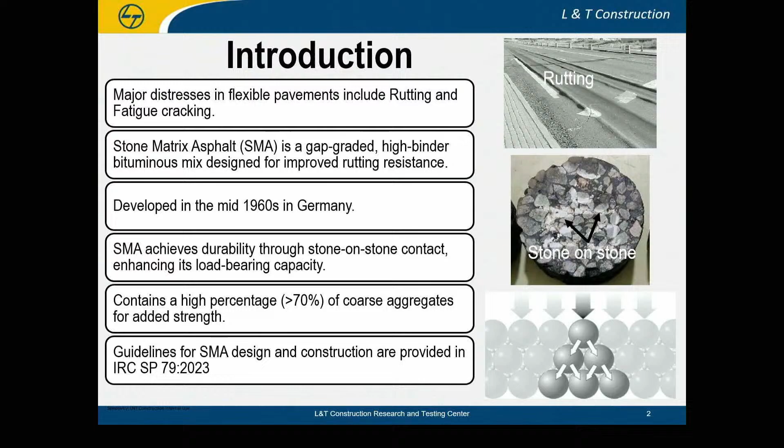So if you see the main criteria through which the SMA gains its strength is stone to stone contact, aggregate to aggregate contact, and that is possible only if we have a sound gap graded mix.

If you see global SMA gradations, the typical nominal maximum aggregate size which affects the aggregate gradation ranges from 14, which is in Australia, as the maximum size, and it goes as low as 5 in countries like Germany. But in our code IRC SP 79 2023, the nominal maximum aggregate sizes are restricted to 19, used in the intermediate binder course, and also 13, used in the wearing courses, which typically has a layer thickness of 40 to 50.

So that was the objective, that was the motivation behind our research work. Can we not reduce the nominal maximum aggregate size in SMA mixes in India? Can we not go down to 9.5, 4.75? If you go down to such lower nominal maximum aggregate size, what is the impact? And also in those aggregate sizes, what is the impact of different types and shapes of gradation curves on the properties?

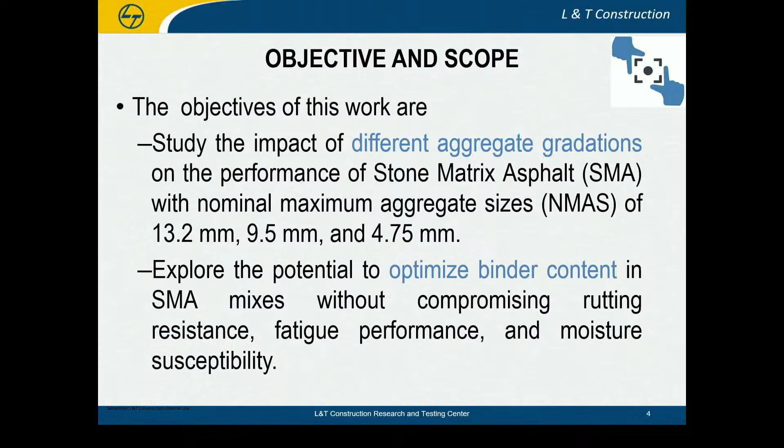So we have done a small study on that. And also one of the reasons why SMA has not been very popular in India is extremely high binder content. Of course, it is required to ensure the durability of the mix. But is there any way in which we can play around with the gradation and optimize the binder content without affecting any of the performance characteristics of the mixes?

So this was our methodology. We have considered three different mixes, 13.2, which is there in our IRC SP 79 2023. We have also considered nominal maximum sizes of 9.5 and 4.75 to produce SMA mixes. In all these three mixes, we have used three different types of aggregate gradations: S curve, mid curve, and inverse S curve. I will discuss this in my further slides.

And what we have studied is basically the volumetric properties, which is the minimum requirement of IRC SP 79. We have also done mechanical characterization of the mix, and also performance characterization in the form of Hamburg wheel tracking test, moisture susceptibility, and fatigue life testing.

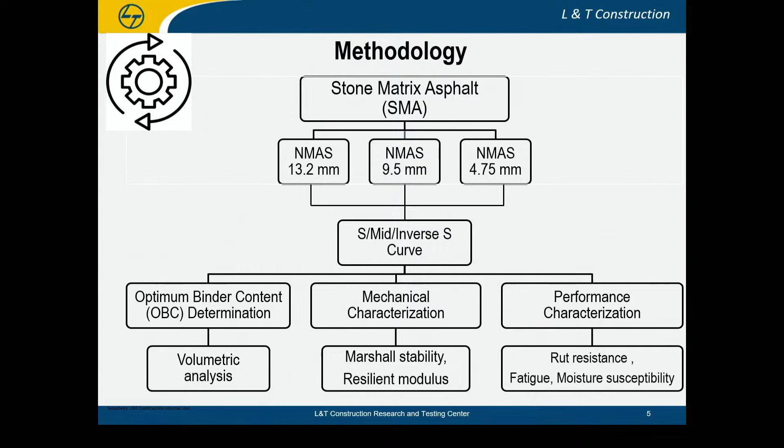So these are the raw materials. We used coarse aggregates which are meeting the MoRTH fifth revision and the IRC SP 79 guidelines. VG40 bitumen was used in this study. This study was done in 2022, where VG40 was also allowed in SMA mixes. We also used cellulose fibers which were meeting the requirements of IRC.

So this was our laboratory investigation. In volumetric analysis, we have considered voids in coarse aggregate, bulk specific gravity, optimum binder content, air voids, VMA and VFB properties. In mechanical characterization, we had Marshall stability and flow, tensile strength ratio and resilient modulus, and performance characterization was done by Hamburg wheel tracking test and 4-point bending test.

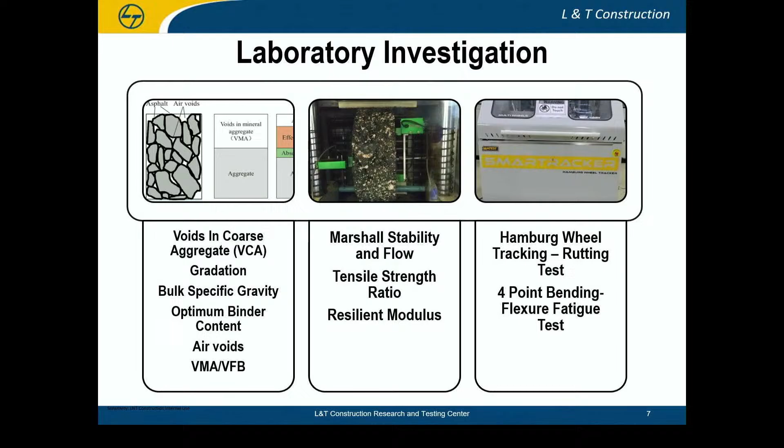So these are the gradation curves that we have used for 13.2, 9.5 and 4.75 mm aggregates. There were 3 curves which were used. One was the midpoint curve, which is considered to be the densest particle line. Then we have used an S curve, which is very popular among pavement practitioners because of its performance. And we have used an inverse S curve.

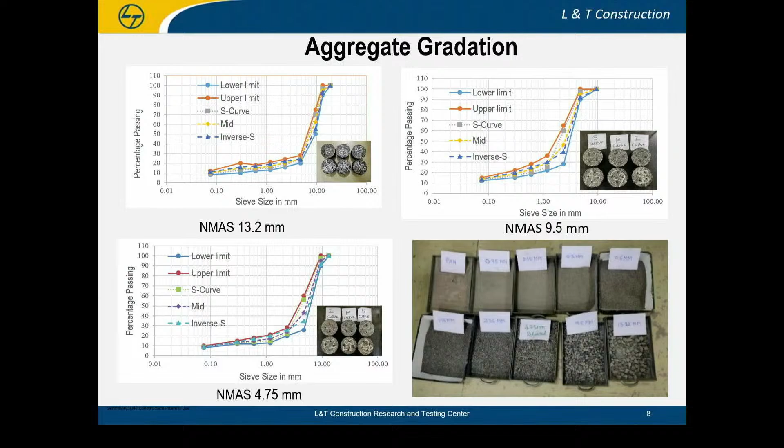So if I show you in a magnified way, the S curve had percentage passing of coarse aggregates to be finer and the finer aggregate to be slightly coarser. Inverse S curve was the opposite of it, and mid curve was the standard mid curve.

So starting with the voids in coarse aggregates, what we observed was in the inverse S curve gradation, we found the lowest voids in coarse aggregates, which indicates that there was better packing when the gradation was changed from S curve to mid curve to inverse S curve.

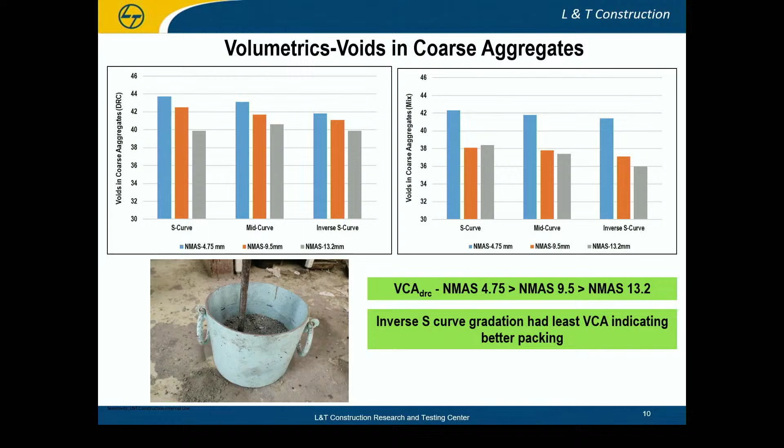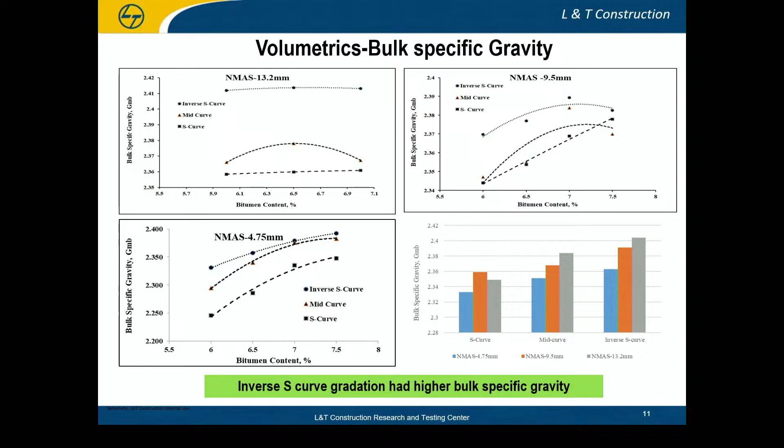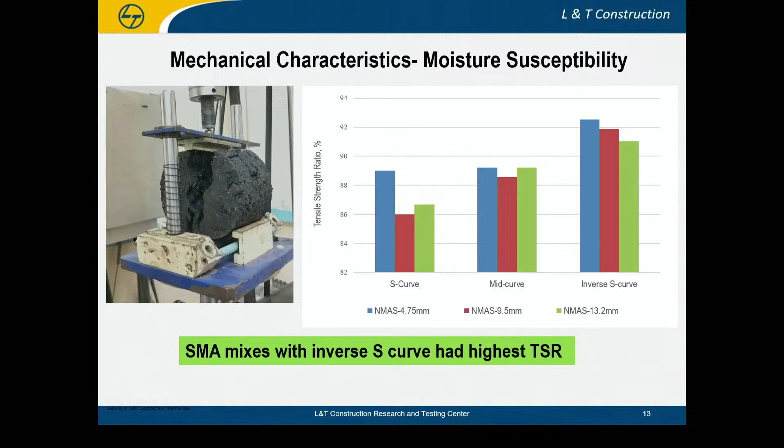The mechanical characterization was done by the moisture susceptibility test, and it also shows that inverse S curves perform better than other gradations. We can see here it was as high as 92 to 90% for inverse S curves, whereas the S curves and mid curves gave relatively lower tensile strength ratios, which indicates the moisture susceptibility or moisture related performance of the mix. We have also found out the resilient modulus of the mix.

The resilient modulus values for SMA mixes are not stipulated in IRC 37, which is the design guideline for flexible pavements. It only gives BC and DBM mixes. So we tried to quantify the resilient modulus of SMA mixes. It was slightly lower than what we get in our conventional VG40 DBM mixes. VG mixes should also be lower, but we can consider the same modulus for our design.

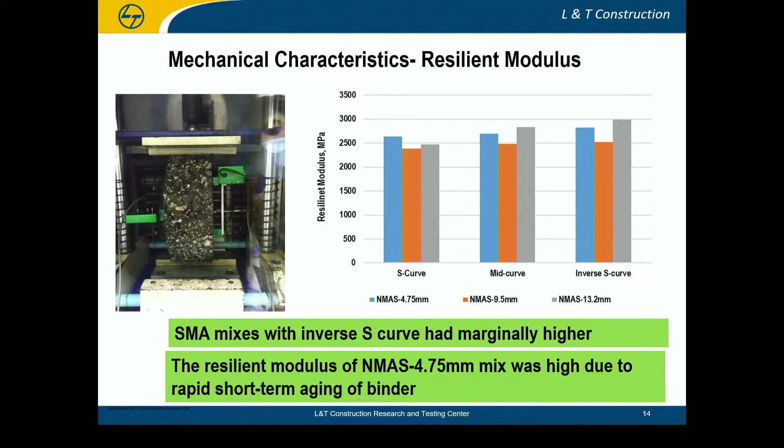Here the modulus values were slightly lesser, but because of better packing in the inverse S curve, we can see the modulus values are slightly higher than other gradations.

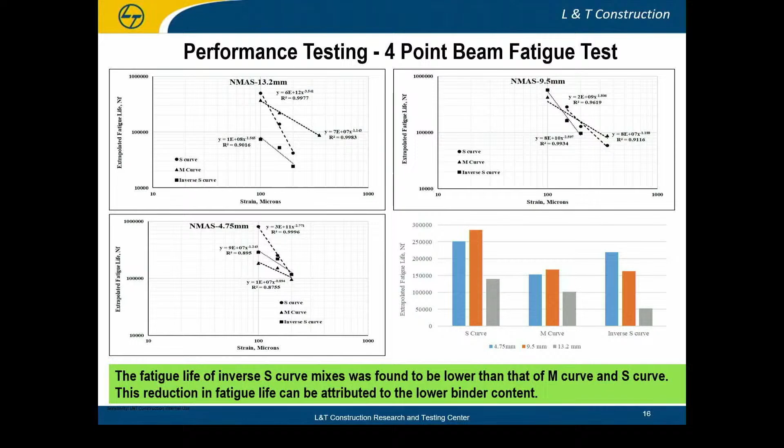Fatigue life with inverse S curve was found to be the lowest, because obviously we saw the optimum binder content was lower for inverse S curve mixes. Hence, we could find this translated into lower fatigue lives of the inverse S curve mixes.

Coming to the conclusion, we found that the inverse S curve gradation was found to furnish the most optimum particle packing, facilitating lower optimum binder content, better stiffness, and lower moisture susceptibility. The inverse S curve was found to have lower rutting potential compared to other gradations. The fatigue life of SMA mixes with nominal maximum aggregate size of 9.5 mm was comparatively better than 13.2 mm, indicating better performance and service life. The laboratory results suggest that nominal maximum aggregate size of 9.5 mm can also be considered.

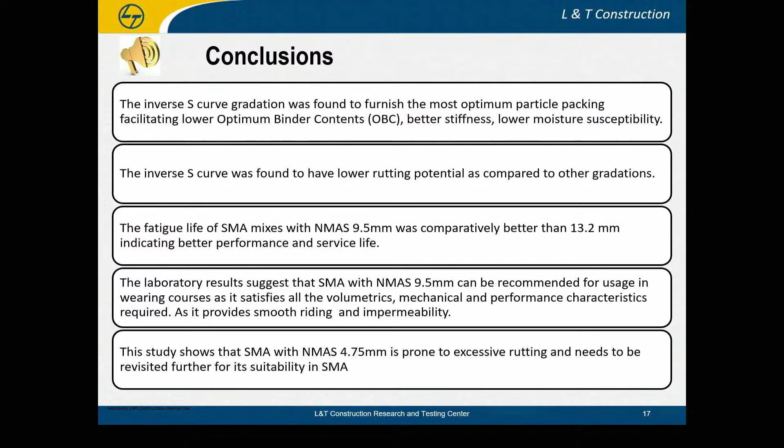But of course this is a laboratory trial. Lot of field trials need to be done to ensure that the performances are translated at the sites. But the initial starting is encouraging. And what we found is that SMA with nominal maximum size of 4.75 mm is prone to excessive rutting and needs to be revisited further for its suitability for usage in SMA.

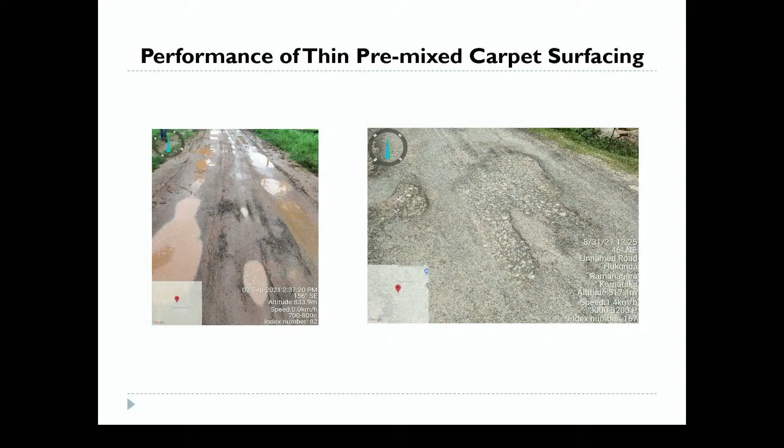They evaluated the performance of this premix carpet, not only by them, but India as a whole. We studied in a pan-India study: NIT Kurukshetra, IIT BHU, MNIT Jaipur, SGS Institute of Technology Indore, IIT Patna, NIT Trichy, as well as Rasta Bangalore. We have evaluated 116 sections in 365 kilometers.

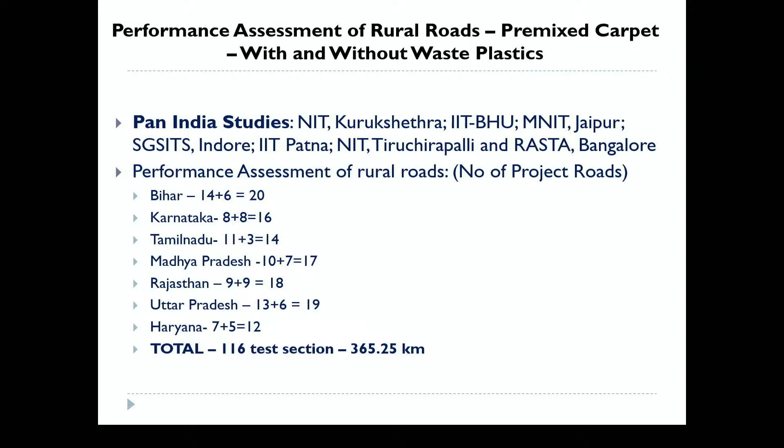So the question at this point of time is how will a dense mix perform? If you look at the cost comparison, finally what we say is India is poor, we cannot afford bituminous concrete or dense mixes. If you look at the cost, I collected data from Andaman Nicobar to Andhra Pradesh to Arunachal to Assam to Maharashtra. We find that the cost of premix carpet is not cheap as we think.

The cost comes to around 200 to 225 rupees. In some states it is 437. When you compare the cost of a BC of 25 millimeter, the cost is comparable. If you want to compare apple to apple, 20 millimeter to 20 millimeter, you will find that BC is relatively the same cost.

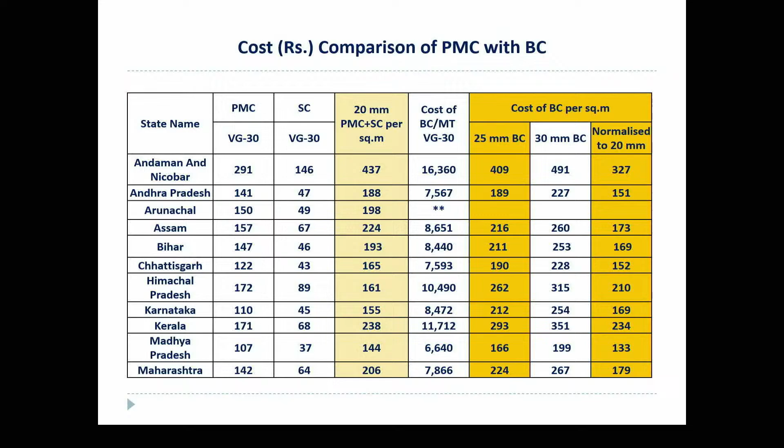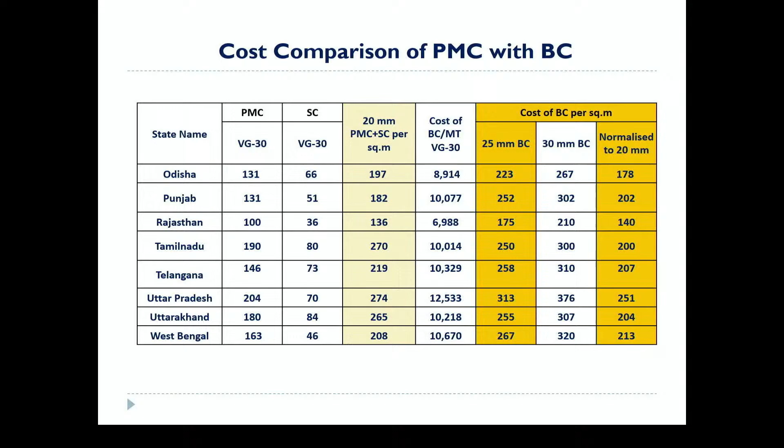Not only that, you can also check other states - Odisha, Punjab, Rajasthan, Tamil Nadu, Telangana, Uttar Pradesh. You can find any state for that matter. The cost of 25 millimeter BC is comparable to that of 20 millimeter premix carpet with a seal coat.

So the issue at this point of time: in Tamil Nadu, when you compare, the cost of premix carpet is 15.25 lakh per kilometer. The cost of BC is only 15.57. Now understand, BC is not costly. What are the other implementation issues? That's what we should talk about.

So the need for the study is that, as per MS2, the compaction level for a Marshall on both ends for traffic less than 10,000 is around 35 blows. For medium traffic, between 10,000 to a million, they say 50 blows. And for higher traffic, they say it should go for 75 blows.

I tried to introduce that in IRC 111, but engineers did not agree for that. They said that for heavily overloaded trucks it will wreck - all the stories they told. Finally I could not introduce that in the new 111.

But what happens is that in the case of low volume roads, because traffic is low, when you compact them initially to 7 to 8%, they do not reach the 4% voids by the end of the design life. The voids remain at 5 or 6. When the void becomes high, it becomes pervious. It is subjected to cracking. It is subjected to moisture-induced damage.

So what we are trying to say is do not compact the low volume road concrete to 75 blows. If so, what should be the number of blows? Vishnu will answer that question. Second, these layers will not reach 4% voids at the end of design life. If so, what should be the desirable compaction standard for low volume roads? We have studied the performance of thin layers of 30 millimeter with BC.

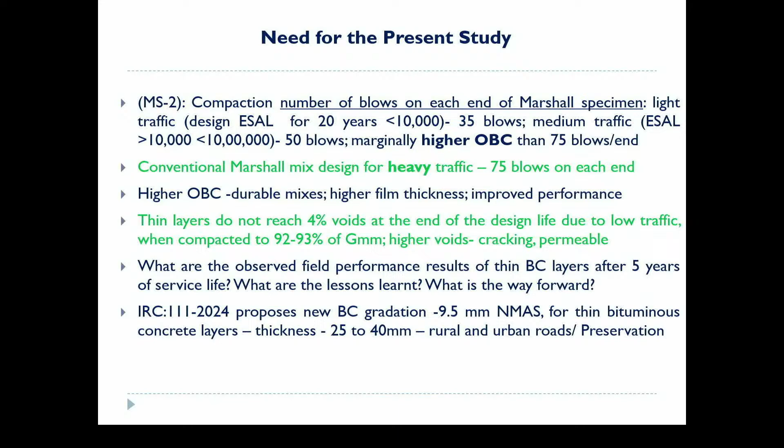I request Vishnu to take it forward with what we have studied. Over to you, Vishnu. Thank you, Professor. Now let me continue the presentation.

We need to understand in any mix design, what does the compaction effort simulate? If you see Marshall mix design as well as Superpave, the compaction effort is expected to simulate the primary and secondary compaction that mixes are likely to undergo in the field. As roads cater to different traffic levels, it is important that these compaction efforts represent the traffic level appropriately.

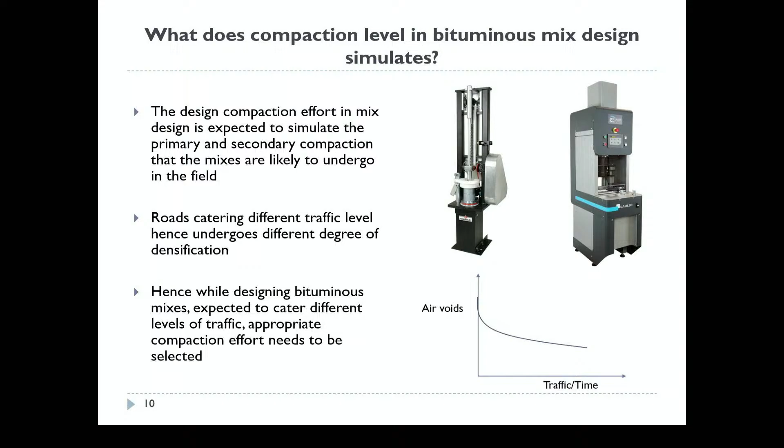If you see the design standards, for example the initial Superpave mix design which came in 1996, the design compaction effort was given as a function of traffic level as well as temperature. Later when they revised it, this was given as a function of traffic level alone.

If you see the original Marshall mix design, which came in the 1930s, you could find that it was also a function of traffic level. But when we adopted this in MoRTH, we are actually designing all our mixes by applying 75 blows of compaction.

Now, when we are trying to adopt dense mixes for low volume roads, it is very important to see the densification characteristics of these mixes.

The objectives of the study are: to evaluate the densification characteristics of dense graded bituminous mixes when placed as thin surface course layers in low volume roads; to estimate the design compaction effort for designing dense graded mixes as surface courses in low volume roads; and to evaluate the implication of lower design compaction effort in terms of the primary compaction.

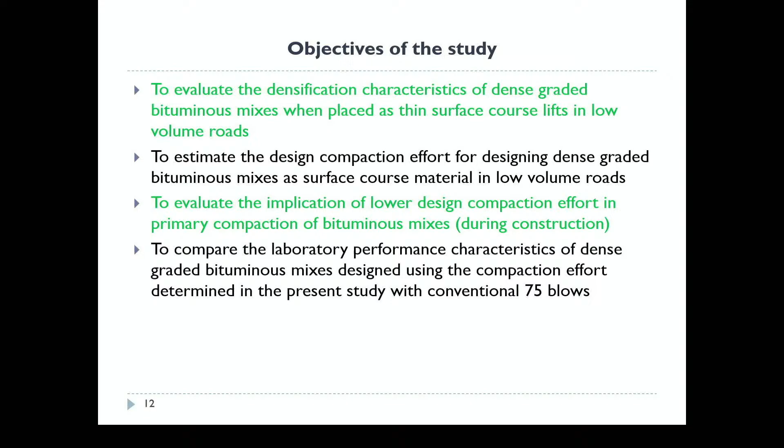The fourth objective was to compare the laboratory performance of dense graded bituminous mixes designed by the compaction effort we determined in our study with the conventional 75 blows.

We have two sets of analysis. For the first set, we had laboratory studies where we collected field cores from sections where dense graded bituminous mixes were implemented. Two states in India have implemented these mixes: Telangana in their PMGSY projects as well as in their ODR and MDR roads, and Kerala in the Rebuild Kerala initiative, where they implemented dense graded bituminous mixes of 30mm lift thickness.

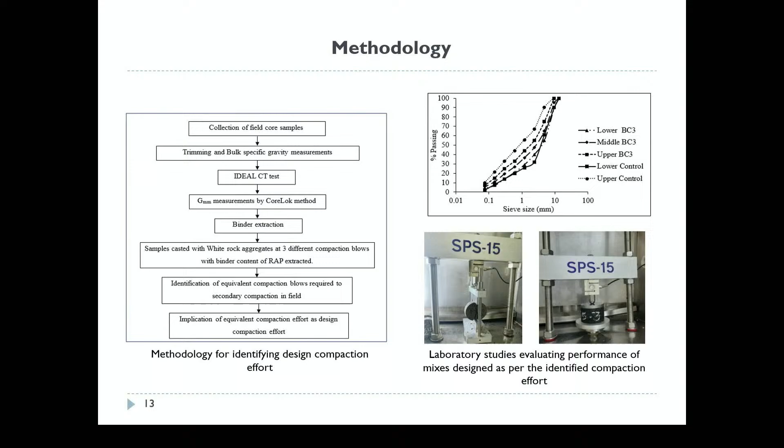The second part of the study was a laboratory investigation trying to understand the implication of this reduced compaction effort on the mix volumetrics as well as on performance.

Let me briefly explain this. In the state of Telangana, in ODRs and MDRs, they started constructing these dense mixes from 2018. We took field cores from Khammam district, where the roads were about 4 to 5 years old, sampling 15 roads. From Warangal, we took 7 roads with an age of 1 year. And from Kerala, we had 8 roads taken, with an age of less than 1 year.

Let me explain the pattern of coring we did. We didn't have initial information on what air voids these mixes were initially compacted to. So we collected two sets of cores: the first core was collected from the pavement edge, nearly 0.5 meters from the edge, and the second was taken from the wheel path.

For the cores collected from Warangal as well as from Kerala, these were collected at 0.7 to 1 meter from the pavement edge. Now you could actually see the air voids of this.

So you can actually see, if you look at the field cores taken from the edge, the air voids are in the range of about 8 to 9%. That's the first figure I'm presenting here. Whereas from the wheel path, when we are taking cores, these mixes have only undergone densification.

It was only having air voids in the range of about 6 to 7%. So what we need to understand is when we are actually placing these dense mixes, designed by 75 blows, these mixes are not undergoing significant secondary compaction. Now this will have implications.

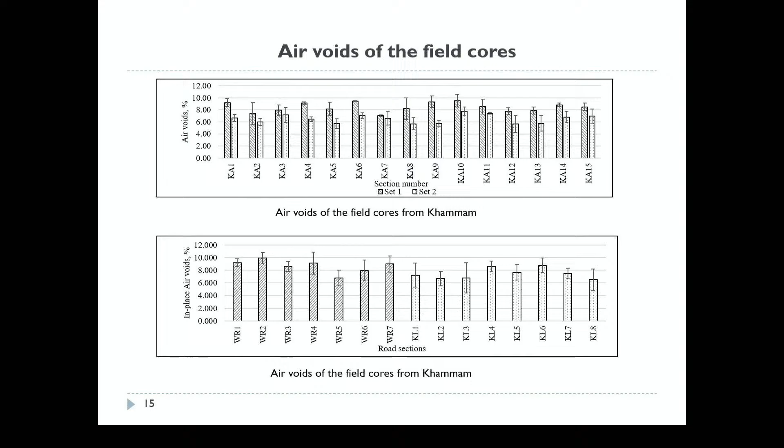So you can see here, the mixes designed by applying 75 blows had lower initial air voids. We then examined the distribution of air voids over a period of 5 to 6 years, the air voids were reduced only from 8% to about 6.5%.

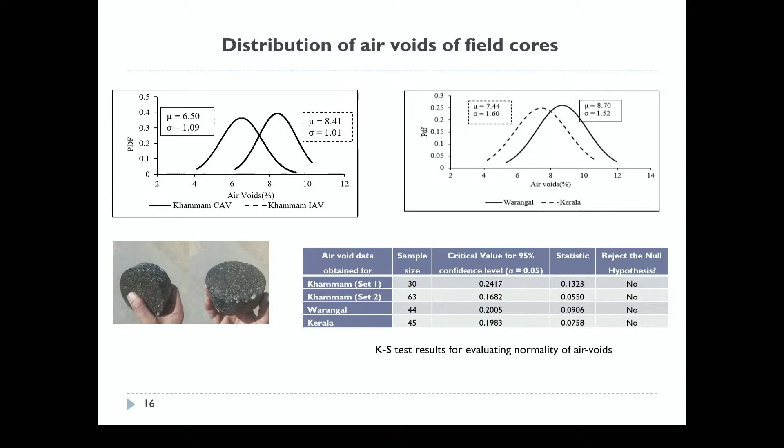These were the roads which were in service for about 5 to 6 years. Now, when there is no traffic moving on these roads, these mixes will remain as they are, and as they remain open, they will undergo excessive aging. To understand this implication, we carried out the IDEAL-CT experiment.

You could see that the IDEAL-CT values of the cores we collected from Khammam were in the range—the mean value was about 21. This has a high propensity for cracking once traffic starts moving on it.

But whereas if you see the IDEAL-CT values of the cores collected from Kerala, this was coming in the range of 100. This is because these mixes have relatively higher binder content.

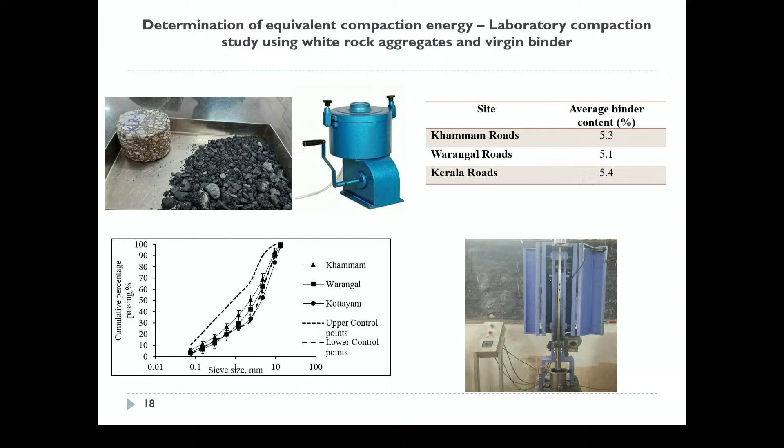Now, to identify the design compaction effort, we collected these field cores, loosened these mixes, and got the white rock aggregates. These were compacted at two binder contents, one at 5%, the other at 5.5%. You could see that the cores from Khammam had a mean binder content of 5.3.

Now what we were looking into was the number of compaction efforts which can actually simulate the air voids in the field, and we could identify that nearly 46 blows of compaction can actually simulate the degree of densification these mixes undergo in the field.

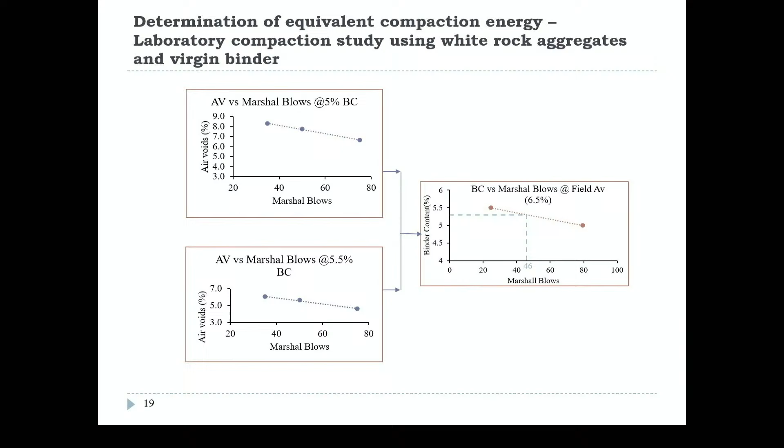Now, to understand the implication of this reduced compaction effort, we carried out volumetric and performance tests on mixes having NMAS of 9.5. We had 5 aggregate gradations for which we designed these mixes by applying 46 blows as well as the conventional 75 blows.

So I'm winding up. You could see here, when we are designing these mixes at a reduced compaction effort, obviously your binder content will be on a higher side.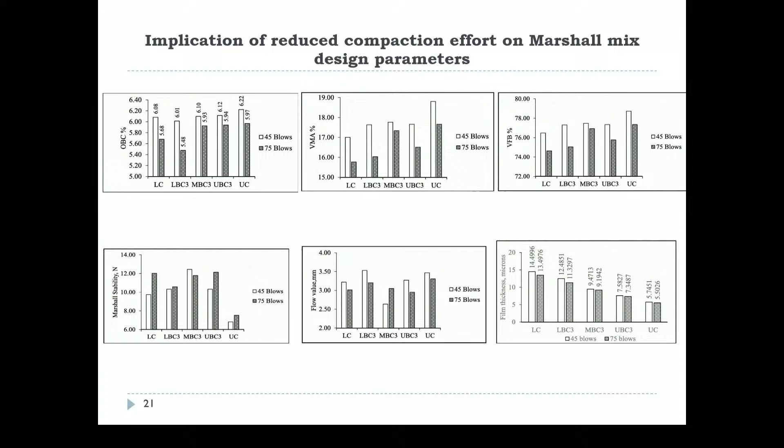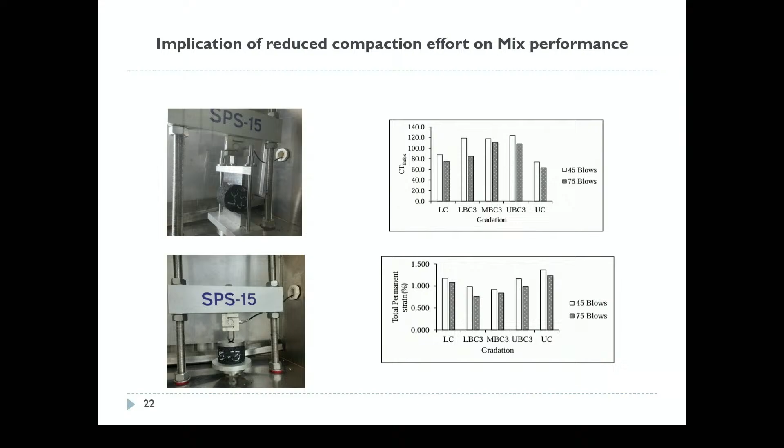Now we also carried out performance tests by carrying out IDEAL-CT and dynamic creep tests. You could see here, when these mixes are designed by applying 45 blows, the IDEAL-CT index of these mixes were improved. And these are our conclusions.

Mixes which were designed by applying 75 blows left relatively larger voids. So it is very important to design these mixes at a reduced compaction effort. Mixes designed by applying 45 blows of compaction had improved placement characteristics in terms of reduced air voids.

You could also see that the IDEAL-CT index values of the field cores we collected from Khammam were relatively low. This actually shows signs of higher propensity for cracking.

Now the study recommends 45 blows of Marshall compaction on both sides for designing dense mixes for low volume roads. Comparative analysis showed that when you design mixes by 45 blows, there is an increased bitumen content. Now this becomes a concern for everyone.

Now, if you want to continue to design these mixes by applying 75 blows, it is important that you compact these mixes to reduce voids. That means initially when you compact this, you have to compact it to an air void of about 4 to 5%. Now this can become challenging. This has to be quantified.

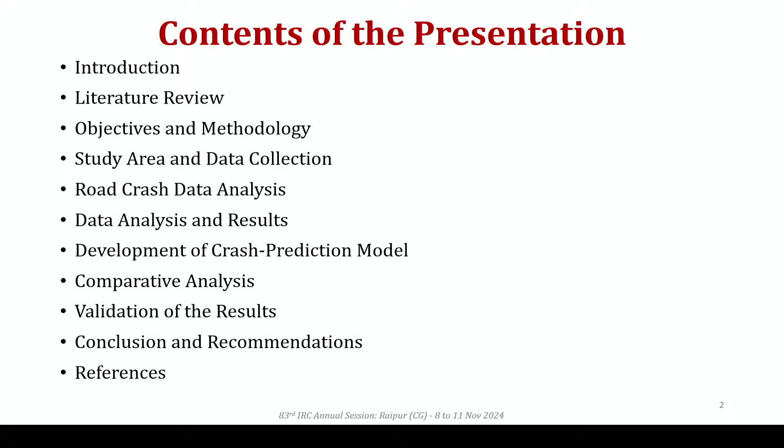So let's start with introduction. As we all know, road safety is a major concern globally and in our Indian country also, where road crashes are increasing year by year. As we can see from the latest MoRTH report, in year 2022 we have around more than 4.6 lakh road crashes and 1.68 lakh fatalities. Road crashes have increased 11.9% from last year to current year, fatalities by 9.4%, and injuries by 15.3%.

To rectify this road crash issue, mostly all the roading agencies identify black spots, that is basically high risk potential areas in our road network in terms of intersections, mid-blocks, or any high risk corridors. So a black spot is a road segment or location known for disproportionately high frequency of crashes or fatalities. It may be due to various factors like road geometry, human factors, traffic, and environment.

In India and internationally, we have many methods to analyze and identify black spots, like statistical analysis, crash rate analysis, risk mapping, GIS analysis, road safety audits, etc. These methods introduce some inaccuracies in the outcomes of black spot identification analysis, that lead to generating some false positive and false negative results. For example, if we falsely predict a black spot but actually the results are not good, this hinders the understanding of high risk locations.

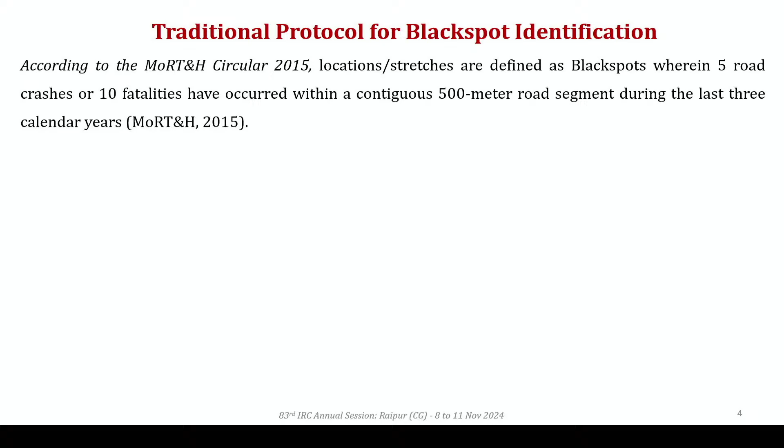This is the traditional protocol for black spot identification that we were using before year 2022. This was published by MoRTH, Ministry of Road Transport and Highways, in the form of a circular in year 2015. It defines a location or stretch as a black spot where 5 road crashes or 10 fatalities have occurred within a 500-meter road segment in the last 3 years.

Two years ago, IRC 131 was introduced, which showcases the guidelines for identification and rectification of black spots. It introduces around 4 to 5 systematic processes for black spot identification which are aligned with a safe system approach and multiple international standards. It includes first, the annual average total crashes method with a setting reaction level approach; second, heat map analysis and corridor analysis; and then the severity index and severity indices method.

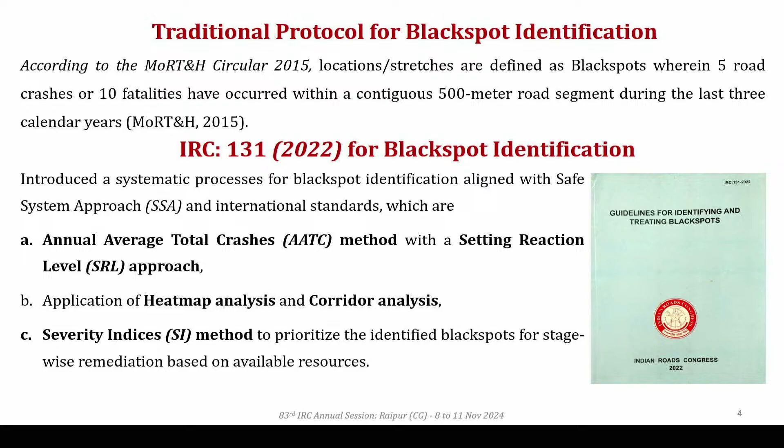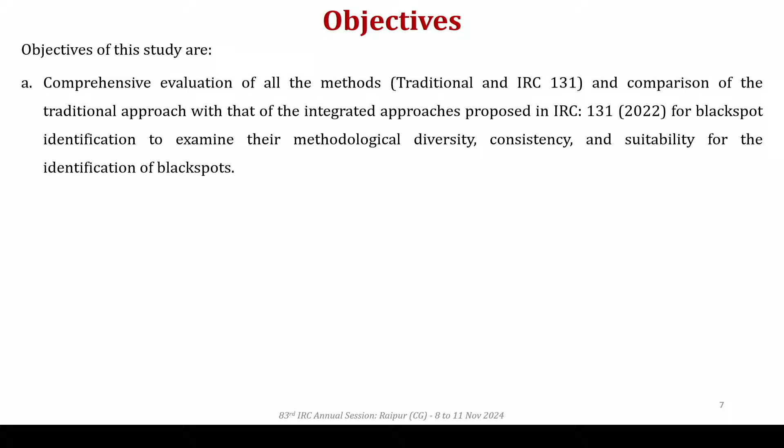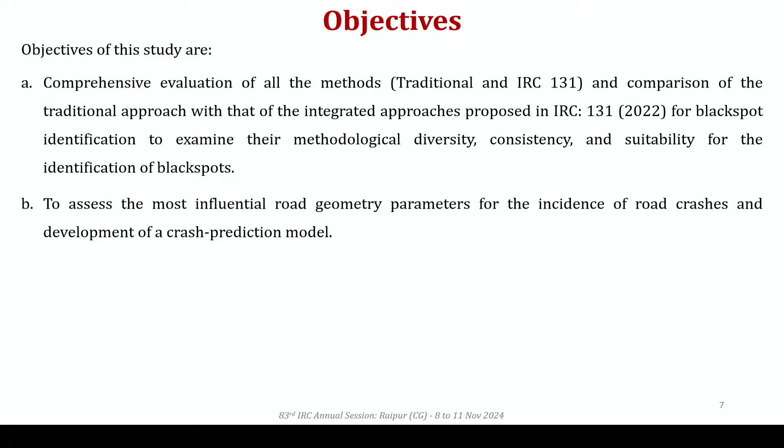Based on the previous studies and literature, we have set objectives like comprehensive evaluation of all the methods present in India, like traditional and IRC 131 methods. Secondly, comparison of the traditional approach with the integrated approach proposed in IRC 131 for black spot identification, to examine their methodological diversity, consistency, and suitability for identification. Third, to assess the most influential road geometry parameters for the incidence of road crashes and development of a crash prediction model, mostly based on the road geometry part.

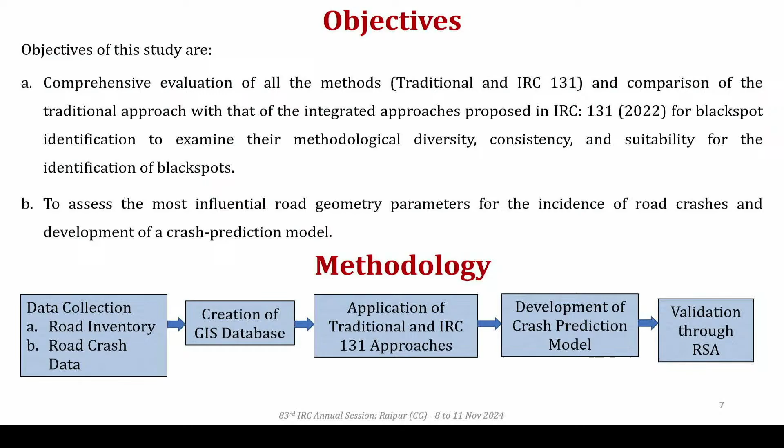To do the study, we selected one study area on NH44 that starts from Hyderabad outer ring road to Adilabad city. This is a 290-kilometer road network in National Highway 44, situated in Telangana state. This corridor is a 4-lane divided, partially controlled access highway with multiple median openings at less than 2-kilometer intervals.

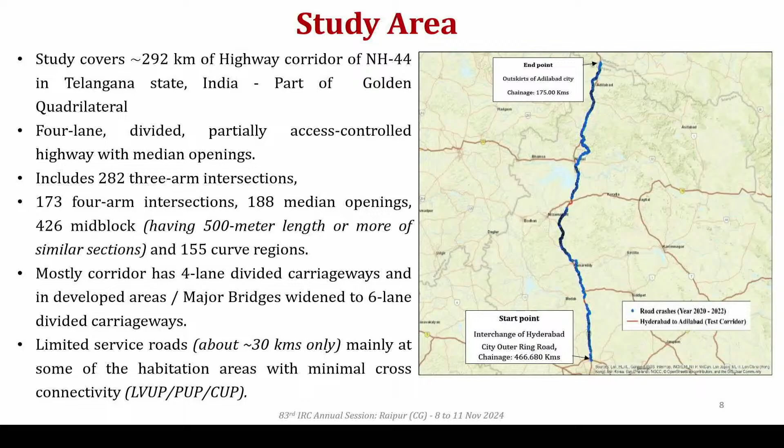It includes 282 3-arm intersections, 173 4-arm intersections, 188 median openings like this, and also 155 curve regions. This test corridor has limited service road, about 30 kilometers only, mainly at some habitation areas with minimum connectivity.

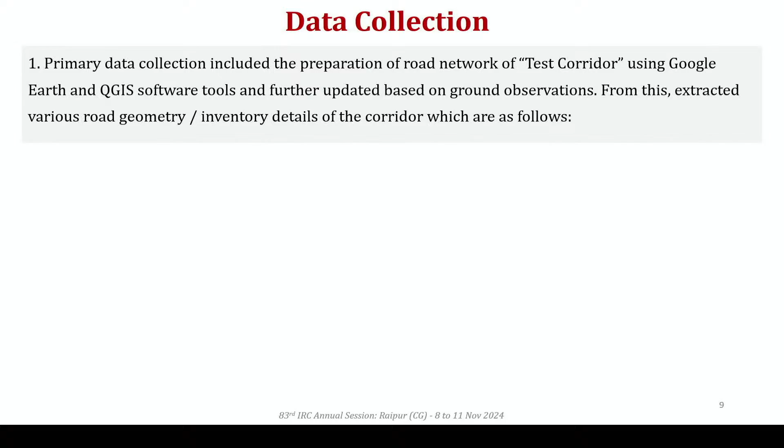To conduct the study, we collected two kinds of data. Firstly, we extracted all the road geometric details from the prepared test corridor developed using Google Earth and Google Maps, and further improved through QGIS software. From the test corridor, we extracted multiple road geometric parameters like road width, curve regions including horizontal and vertical, intersections (3-arm, 4-arm), and presence of median openings.

Secondly, we collected the road crash data, historic crash data from NHAI of the last 3 years from 2020 to 2022, totaling around 1504 road crashes, including the claimed fatalities and injuries of this test corridor.

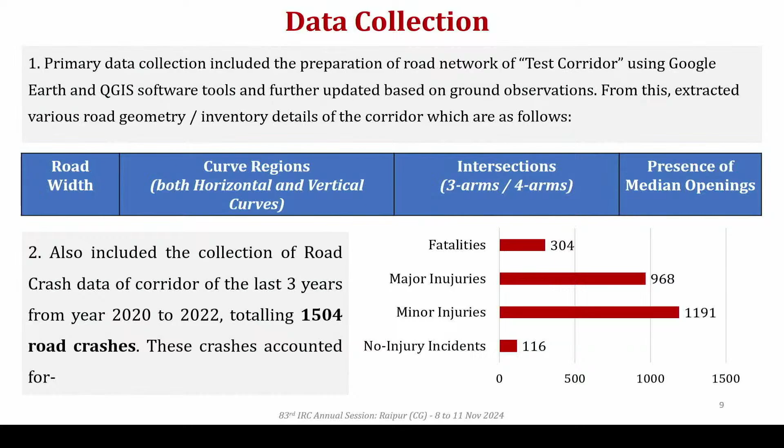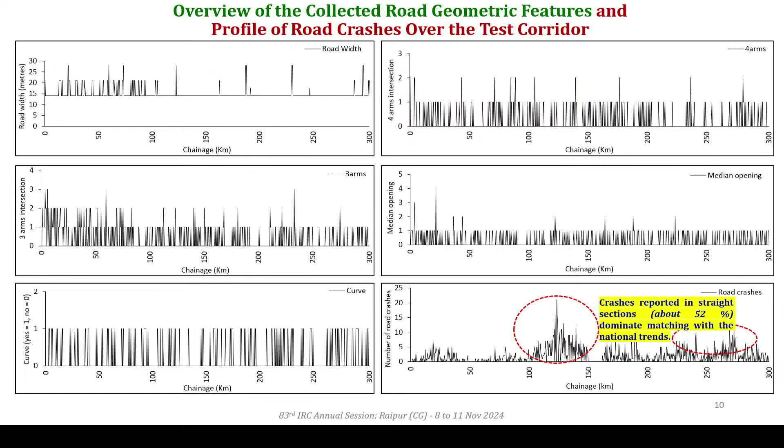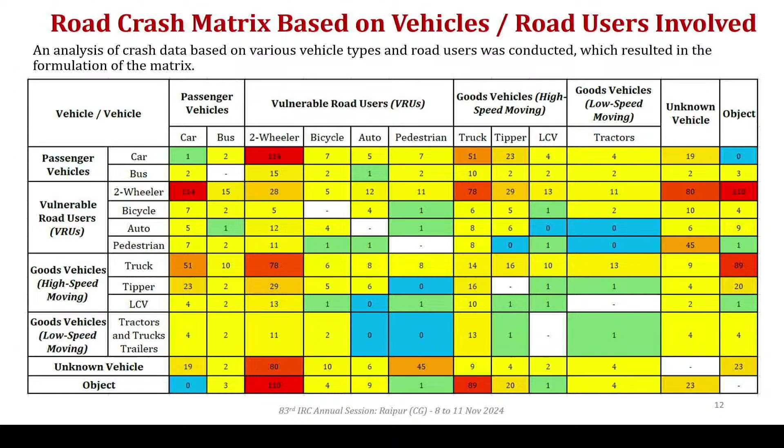After that, we prepared road crash matrix based on vehicles involved. We developed comprehensive data on vehicle and road users involved in these road crashes. We observed mostly goods vehicles, two-wheelers, cars, and unknown vehicles or static objects were involved in these crashes in this test corridor.

After that, data analysis and results. Data analysis starts with the segmentation of the test corridor, as mentioned in IRC 131 and MoRTH protocol. We segmented our study corridor into 500-meter segments, resulting in a total of 584 segments considered for analysis. For the specific corridor analysis method of IRC 131, the study corridor is empirically segmented into 10 equal segments, as no segmentation method is present in IRC 131.

Secondly, the creation of a GIS database. To perform the analysis, we developed a GIS database in QGIS software, where we incorporated all the road geometric details and road crash information, including fatalities, injuries, 3-arms, 4-arms, etc.

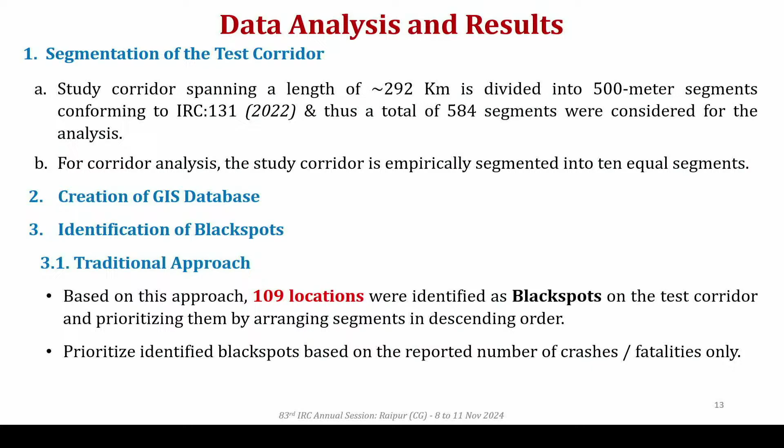After that, we performed identification of black spots. Using the first traditional approach, the MoRTH protocol, we identified 109 locations based on the 5 road crashes or 10 fatalities definition, prioritizing them by arranging segments in descending order. Secondly, we identified black spots based on the reported numbers of crashes and fatalities only.

Second method of IRC 131 is the annual average total crashes (AATC) method with the setting reaction level approach. This method's objective is to identify crash-prone and black spots by calculating the annual average total crash value. This is a new term for our black spot identification analysis across all road categories.

This is the procedure for calculating AATC per 500-meter value. First, we collect the fatal crash data of all road types and states. Then we calculate the road length for each road category, then calculate AATC per kilometer value, and lastly, AATC per 500-meter value.

The process to identify black spots using this method is: first calculate the AATC per 500-meter value for all kinds of road network and state type, then identify black spots as 500-meter segments where crashes exceed the AATC per 500-meter value.

After identification of black spots, to categorize them we use the setting reaction level approach, where first order black spots are where the crash value exceeds 15x of AATC, and second order black spots are where crashes have increased from 10 to 15x of AATC. Likewise, the third and fourth order black spots are calculated.

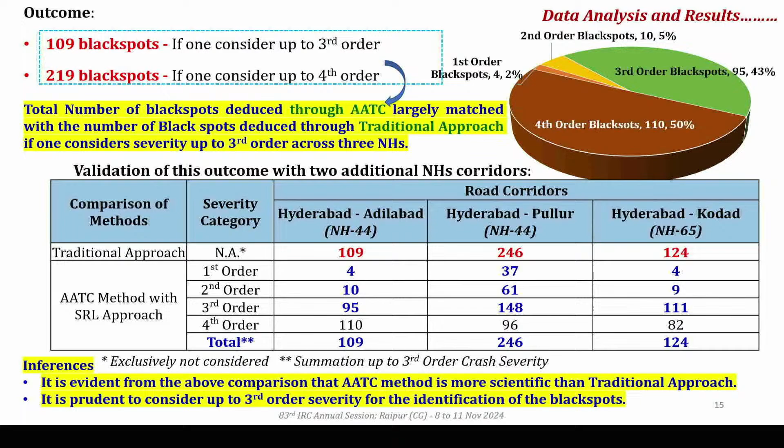The second method of IRC 131 is heat map analysis, where we identify crash hotspots using geospatial analysis in GIS software. We import all the test corridors and road crash data into the GIS platform, and apply kernel density estimation methods like point density estimation to identify crash hotspots. This gives hotspots with varying colors, where warm colors represent high density crash regions and cooler colors represent low density crash regions.

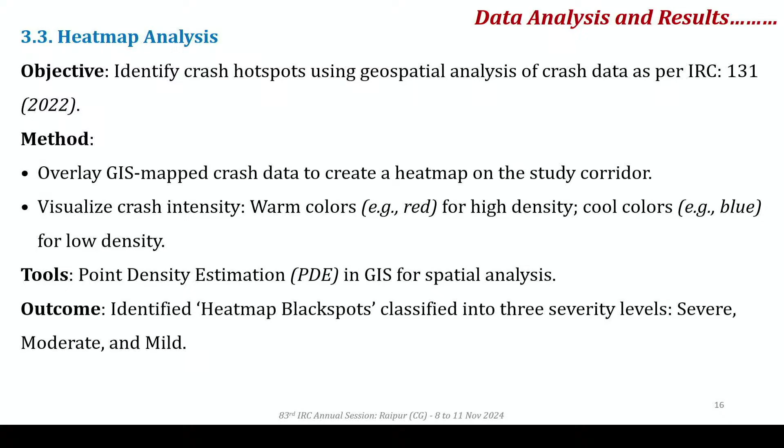We have categorized these hotspots into three categories based on severity: severe, moderate, and mild.

Third is corridor analysis, which is mostly similar to heat map analysis. Here we segmented our test corridor into 10 segments empirically and applied line density estimation to identify the most severe segment in our test corridor, where segment 5 is the most severe segment we identified.

This is the fourth method of IRC 131, the severity indices method. This method is proposed in IRC 131 to prioritize the identified black spots for rectification and remedial measures work, using weights: for fatal crashes weight is 10, for major injuries 5, minor injury crashes 2, and no injury crashes 1.

These weights are normally only for prioritization of identified black spots. But in our study, we propose using these weights for identification of black spots as well, using the following process: first calculate the crash severity index for each segment based on these weights, second calculate the mean severity index and standard deviation, and third calculate the threshold crash severity index using a normal distribution method with a Z score at varying confidence levels like 95%.

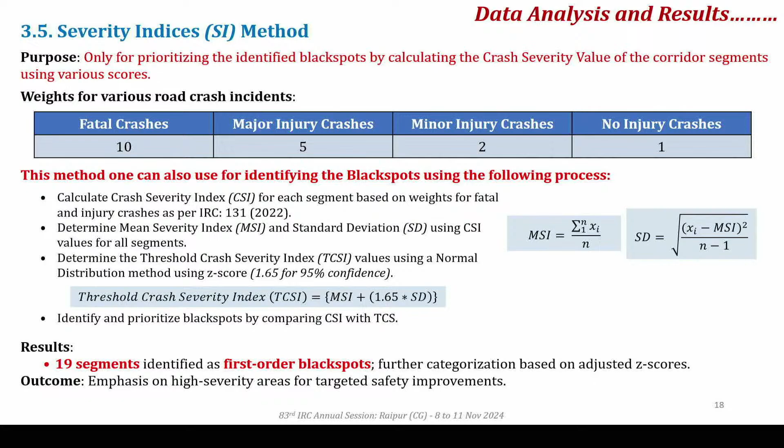The outcome of this method is 19 segments identified as first order black spots, with further categorization based on adjusted Z scores.

Moreover, we have developed a crash prediction model, since we don't have any crash prediction model based on road geometry parameters. We developed it using parameters like road width, curve regions, intersections, and presence of median openings. We built a GLM model, a generalized linear model, using a Poisson log-linear approach, and found all these parameters significant with road crashes.

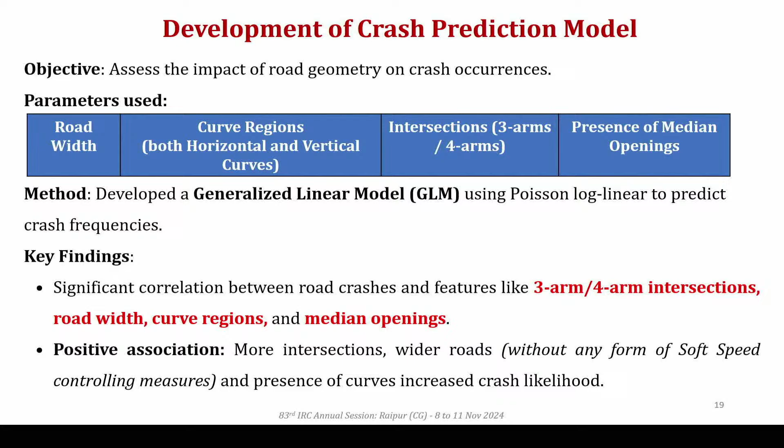This is our model for predicting black spots based on road geometry parameters, where all the parameters show good significance against road crashes.

These are our identified black spots, the top 20 identified from various methods: first from the traditional approach, then the AATC method, SI method, heat map analysis, corridor analysis, and lastly the crash prediction model.

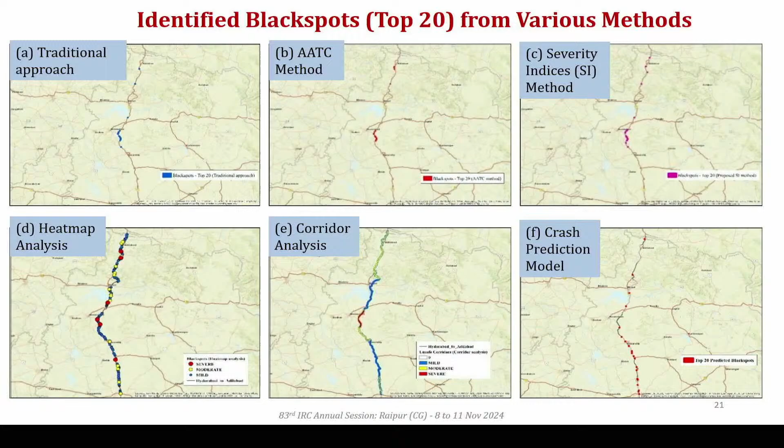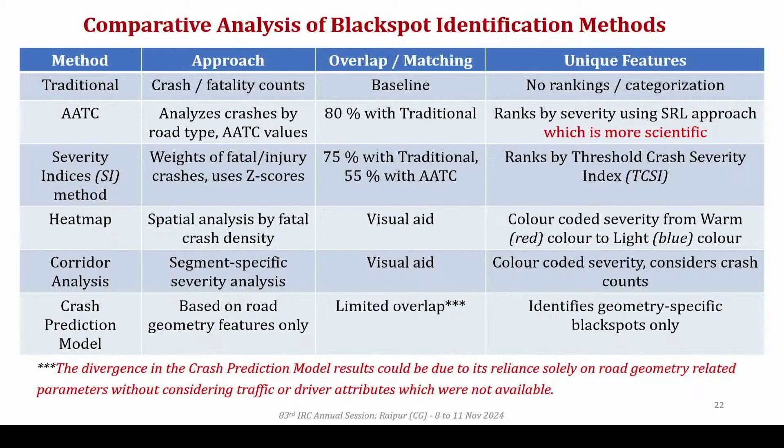The severity indices method aligns 75% with the traditional approach and 55% with AATC, and we rank and categorize all identified black spots by TCSI values. The heat map and corridor analysis methods give only visual results. We come to conclusions, and these are the list of top 20 black spots.

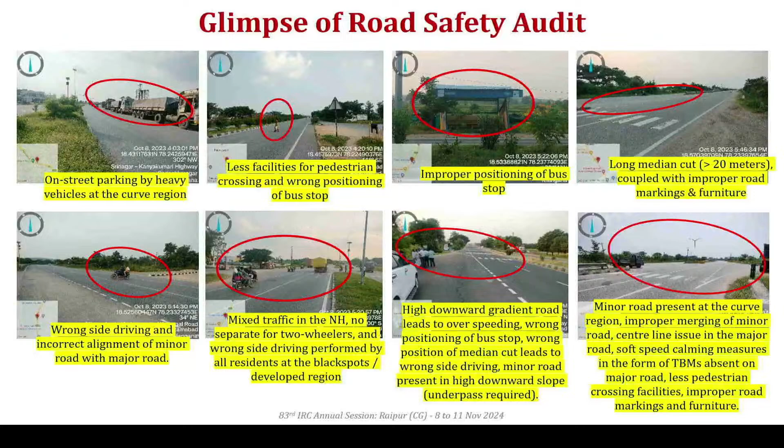We have validated these outcomes through road safety audit processes, and we have perfectly audited them, and all the outcomes are perfectly aligned with the ground observations. These are some glimpses of the road safety audit process during our study.

In this study, we have comprehensively analyzed the traditional approach and IRC 131 methods. We have noted that traditional methods have several limitations, like overlooking factors such as road geometry and land use, which leads to false negative and false positive results.

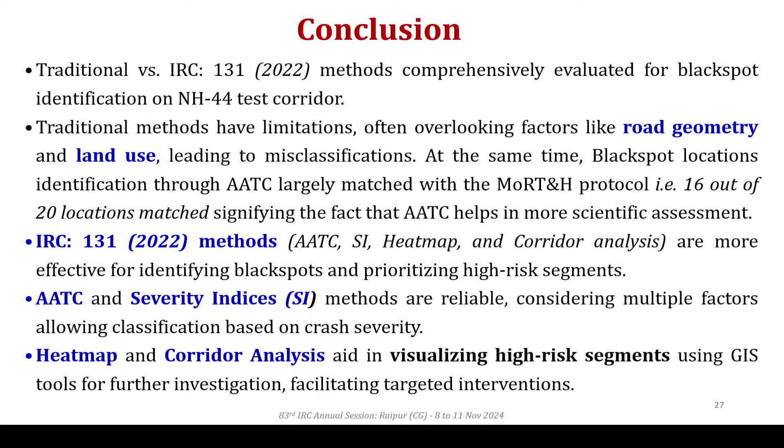We have noted that IRC 131 methods like AATC and SI are more reliable, considering multiple factors like classification based on severity, and identifying using road length and state type category. Heat map and corridor analysis are mostly for visualizing high risk segments using GIS tools. These are some points of recommendation.

As per international literature and previous studies, for the identification of AATC black spots we have to use up to third order, so third order AATC black spots should be considered for effective analysis. The study also recommends using the SI method with a weighted severity crash model to identify and prioritize black spots.

Lastly, for high speed corridors, proactive measures such as conducting RSA during the operation and maintenance period every 3 to 5 years are essential to maintain safety and achieve zero fatalities, or the vision for 2030. These are the references. This paper has already been published in the Journal of Indian Road Congress.

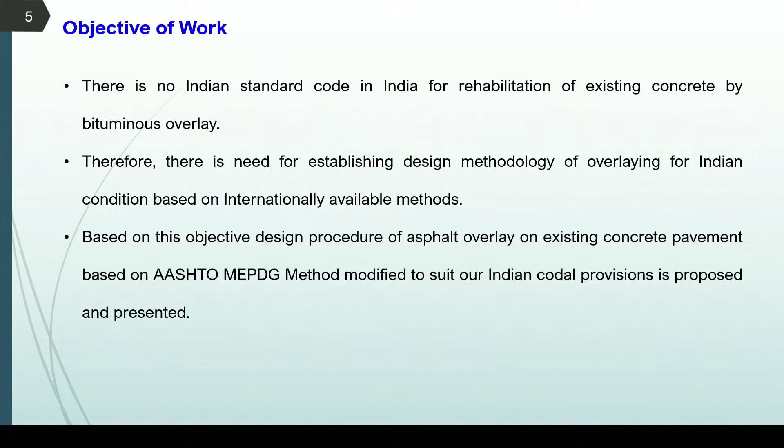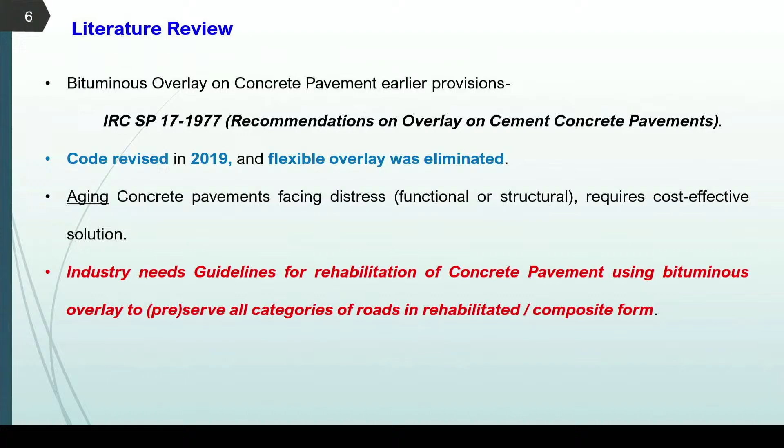अब यदि हम लिटरेचर रिव्यू की बात करें तो हमारे पास एक IRC SP 17 था 1977, जो कि इम्पेरिकल डिजाइन अप्रोच से बिटुमिनस ओवरले का हमें बताता था कि कंक्रीट के ऊपर कितना बिटुमिनस ओवरले की थिकनेस रिक्वायरमेंट रहेगी, पर जो अभी रिवाइज हुआ 2019 में, तो ये वाला सेक्शन उससे स्किप कर दिया गया, हटा दिया गया, क्योंकि वो कोड अब डील करता है कंक्रीट ओवरले विद कंक्रीट पेवमेंट। सो हमें एक अलग से इंडियनाइज गाइडलाइन की जरूरत है जो इस चीज को डील करे।

ये हमारा 1977 का IRC SP 17 कोड था। ये डेडिकेटेड इंटरनेशनल गाइडलाइंस अवेलेबल है। अब यदि हम बात करें तो जो सबसे हमारी इंडियन पेवमेंट की गाइडलाइंस है वो सबसे ज्यादा इफेक्ट हुई है आस्टो MEPDG गाइडलाइंस से। आस्टो MEPDG गाइडलाइन जो डिजाइन के लिए अप्रोच बोलती है कि आप सबसे पहले एग्जिस्टिंग रिजिड पेवमेंट को इवेल्युएट करो, उसकी डिस्ट्रेस मैपिंग करो, उसका FWD एनालिसिस करो।

उसमें यदि कोई रिफ्लेक्शन क्रैकिंग के लिए जो भी मिटिगेशन के अप्रोच हैं उन्हें देखो, और उसके बाद डिसीजन लिया जाएगा कि आपको उसमें ओवरले किस तरीके का प्रपोज होगा, फंक्शनल कैटेगरी का होगा या फिर स्ट्रक्चरल कंडीशन का होगा।

अब रिफ्लेक्शन क्रैकिंग की बात करें तो कंक्रीट पेवमेंट के ऊपर यदि फ्लेक्सिबल की कोई भी लेयर चढ़ाई जाए तो वो सबसे पहले रिफ्लेक्शन क्रैकिंग उस पर सबसे ज्यादा इफेक्ट करेगा, क्योंकि कंक्रीट रिजिड है और बिटुमिनस जो है वो फ्लेक्सिबल नेचर का है, और कंक्रीट में जॉइंट्स कटिंग होती है और जो जॉइंट्स डायरेक्टली रिफ्लेक्ट होंगे।

अब ये रिफ्लेक्ट किस तरीके से हो सकते हैं कि कंक्रीट में एक्सपांशन और कॉन्ट्रैक्शन होता है, जिसके कारण उसका जॉइंट मूवमेंट होता है, तो जॉइंट मूवमेंट के कारण क्रैक ऊपर माइग्रेट हो जाएगा, या फिर वर्टिकल मूवमेंट हो या फिर पैरेलल मूवमेंट हो जाए स्लैब्स का, तो इसके कारण बिटुमिनस ओवरले में क्रैक डेवलप हो जाएगा।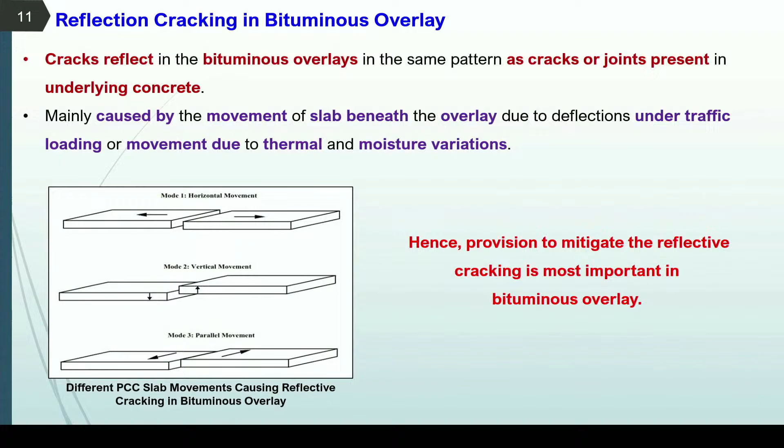तो हमें रिफ्लेक्शन क्रैकिंग को डेवलप होने से पहले उसका ट्रीटमेंट करना पड़ेगा प्रायर टू ओवरले। अब इस पेपर में फंक्शनल डेफिशिएंसी को कैटर करना नहीं किया हुआ। इस पेपर में हम लोगों ने स्ट्रक्चरल डेफिशिएंसी को ट्रीट करने के लिए किस तरीके से डिजाइन अप्रोच अडॉप्ट कर सकते हैं वो डील कर रहा है।

आस्टो एमईपीडीजी की गाइडलाइन जब डेवलप करी गई थी तो पेंसिल्वेनिया डिपार्टमेंट ऑफ ट्रांसपोर्टेशन ने आस्टो एमईपीडीजी की गाइडलाइन के बेसिस पे 11 डिफरेंट सेक्शंस बनाए थे, जिसके ऊपर उन्होंने एफडब्ल्यूडी का एनालिसिस किया।

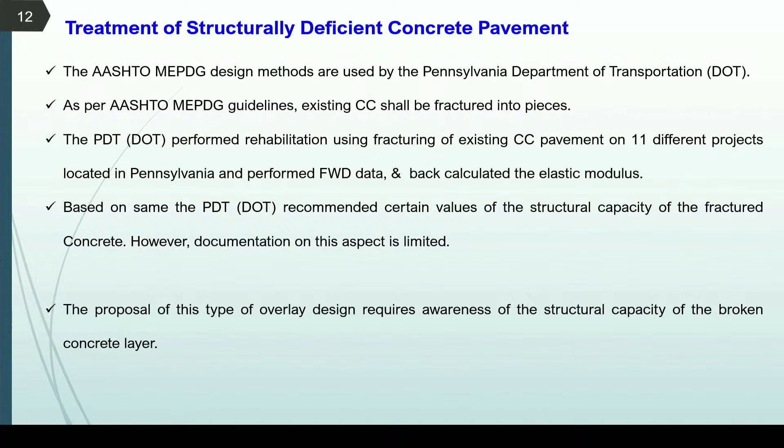उस एफडब्ल्यूडी एनालिसिस से एग्जिस्टिंग लेयर्स का मॉड्यूलस बैक कैलकुलेट किया और डिजाइन को रिकमेंड किया। बेस्ड ऑन 11 डिफरेंट स्टडीज कंडक्टेड बाय पेंसिल्वेनिया डिपार्टमेंट, उन्होंने सबसे पहले एग्जिस्टिंग रिजिड पेवमेंट को 3 तरीके के मेथड से ट्रीट किया - क्रैक एंड सीट, ब्रेक एंड सीट, और रबलाइजेशन - और उसके बेसिस पर उन सारी मेथड से एफडब्ल्यूडी टेस्ट परफॉर्म किया, और उसके बाद एग्जिस्टिंग लेयर्स का मॉड्यूलस निकाला।

अब एग्जिस्टिंग लेयर के मॉड्यूलस को यदि दूसरा लिटरेचर हम लोग देखें तो 1987 में उलिडिज़ नाम के रिसर्चर ने लेयर कोफिशिएंट मेथड को इलास्टिसिटी मॉड्यूलस के साथ कोरिलेट किया, और एक एम्पेरिकल अप्रोच इक्वेशन डेवलप करी कि स्ट्रक्चरल नंबर इज इक्विवेलेंट टू 0.27 मल्टीप्लाइड बाय लॉगरिथमिक इलास्टिसिटी मॉड्यूलस ऑफ एग्जिस्टिंग पीसीसी, रबलाइज्ड पीसीसी और फ्रैक्चर्ड पीसीसी डिवाइड बाय 3000 प्लस 0.35।

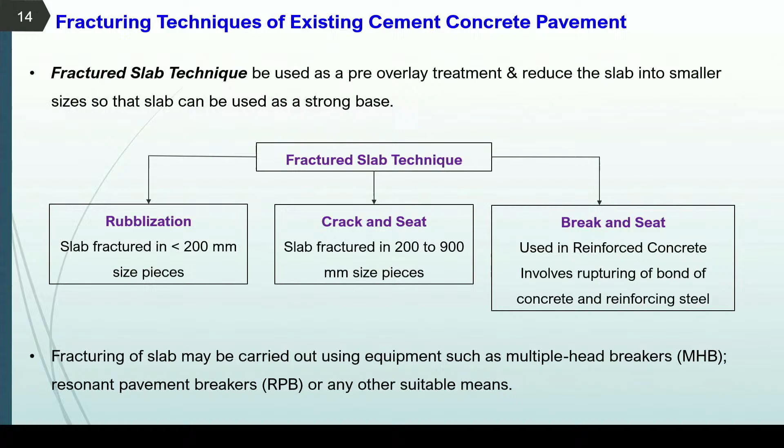अब फ्रैक्चरिंग टेक्निक की बात करें तो आस्टो एमईपीडीजी की गाइडलाइन 3 टाइप्स ऑफ फ्रैक्चरिंग टेक्निक्स प्रोवाइड करती है - रबलाइजेशन, जिसमें एग्जिस्टिंग कंक्रीट पेवमेंट 200mm से कम साइज में पीस में फ्रैक्चर किया जाएगा; क्रैक एंड सीट, जिसमें फ्रैक्चर्ड पीसेस की साइज 200 से 900mm होगी; और तीसरा ब्रेक एंड सीट, जो रेनफोर्स कंक्रीट पेवमेंट के लिए ही किया जाएगा।

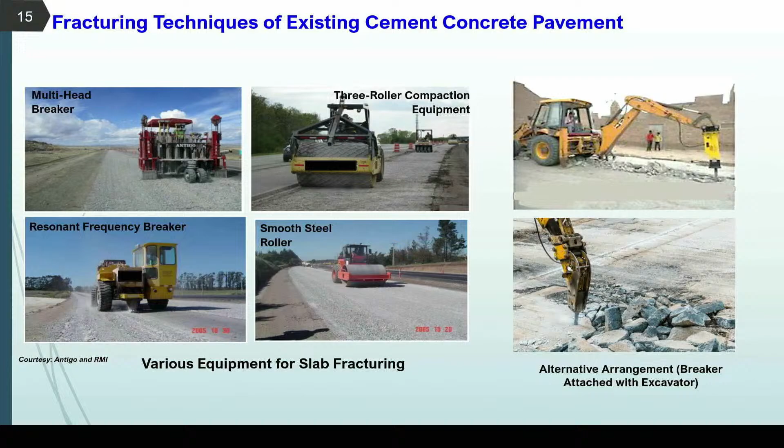ये डिफरेंट तरीके के इक्विपमेंट्स हैं इंटरनेशनली अवेलेबल कि फ्रैक्चरिंग किस तरीके से करी जा सकती है, और राइट साइड में जो 2 इक्विपमेंट दिए हुए हैं वो हमारे इंडियनाइज कंडीशन में एग्जिस्टिंग कंक्रीट पेवमेंट को फ्रैक्चरिंग करने की टेक्निक है।

अब लिटरेचर रिव्यू से हम लोग ये निकाल सकते हैं कि टाइप ऑफ फ्रैक्चरिंग मेथड इज वेरी मच डिपेंडेंट फॉर बिटुमिनस ओवरले फॉर डिस्ट्रेस कंक्रीट पेवमेंट। और जब भी हम लोग इसकी स्टडी करें फ्रैक्चरिंग के बाद तो हमें लाइफ साइकिल कॉस्ट एनालिसिस को जरूर देखना है, और यदि अर्ली डिस्ट्रेस हुआ है पीक्यूसी पेवमेंट में जो 30 साल के लिए डिजाइन हुआ है तो हमें उसका लॉन्ग टर्म कॉस्ट एनालिसिस भी करना पड़ेगा। फॉर एग्जाम्पल फ्लेक्सिबल पेवमेंट के लिए परप्यूचुअलिटी के लिए डिजाइन करना भी रहेगा।

अब आस्टो एमईपीडीजी की डिजाइन देखें तो उन्होंने डिजाइन अप्रोच में बताया कि जेपीसीपी या सीआरसीपी के ओवरले डिजाइन में यदि हॉट मिक्स एसफाल्ट फर्स्ट पार्ट में देखेंगे, हॉट मिक्स एसफाल्ट पेवमेंट में मिलिंग या लेवलिंग या पैचिंग को करके फिर हॉट मिक्स एसफाल्ट किया जाएगा। या फिर दूसरा...

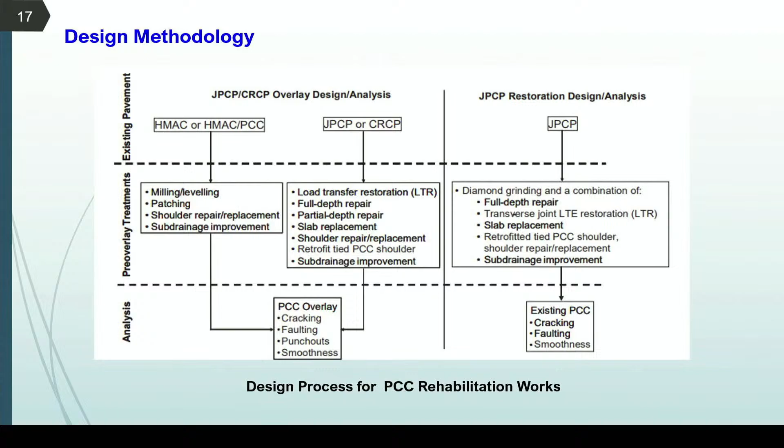जब JPCP या CRCP करेंगे तो आपको उसका फुल डेप्थ रिपेयर करना पड़ेगा और लोड ट्रांसफर एफिशिएंसी सारी रीस्टोर करनी पड़ेगी, फिर उसके बाद होगा। तीसरा वाले में एग्जिस्टिंग पीसीसी यदि ज्यादा ही डिफेक्टेड है तो आपको फुल डेप्थ रिपेयर करना पड़ता है।

इस केस में हम लोगों ने आस्टो MEPDG जो अप्रोच है वो डिजाइन मेथोलॉजी देती है कि सबसे पहले आप एग्जिस्टिंग सबग्रेड का मटेरियल निकाल के सबग्रेड की सीबीआर निकालेंगे, या तो डीसीपी टेस्ट से निकाल सकते हैं या मटेरियल वहां से एक्सकेवेट करके उसका लैब में सीबीआर कर सकते हैं, या फिर जो फ्रैक्चर करने के बाद FWD किया है उससे बैक कैलकुलेट किया जा सकता है।

दूसरा, आपको हर लेयर का स्ट्रक्चरल नंबर निकालना पड़ेगा जो लिटरेचर में दिया हुआ है कि यदि क्रैक एंड सीट मेथड अडॉप्ट करते हैं तो उसमें लेयर कोफिशिएंट की वैल्यू 0.33 रहेगी। यदि ब्रेक एंड सीट अडॉप्ट करते हैं तो 0.34 रहेगी। रबलाइजेशन के केस में चूंकि

एग्जिस्टिंग जो सीसी पेवमेंट है उसके पार्टिकल साइज 200 mm से डाउन हो जाते हैं तो उस पर FWD टेस्ट करना डायरेक्टली पॉसिबल नहीं है, तो सबसे पहले उसके ऊपर एक WMM की लेयर डालनी पड़ेगी और उसको प्रॉपर प्रोफाइल करेक्शन करना पड़ेगा और उसके बाद FWD टेस्ट करना पड़ेगा।

उसके बाद हम लोग इसका एग्जिस्टिंग इलास्टिसिटी मॉडुलस कैलकुलेट कर सकते हैं। फ्रॉम वेरियस एक्सपेरिमेंट पाया गया कि रबलाइजेशन के बाद एग्जिस्टिंग सीसी पेवमेंट का इलास्टिसिटी मॉडुलस 450 MPa से 850 MPa के आसपास तक वेरी करता है, जो एवरेज आउट करके 600 MPa होता है, जो IRC की गाइडलाइन के हिसाब से सीमेंट ट्रीटेड सब बेस को करस्पॉन्ड करता है।

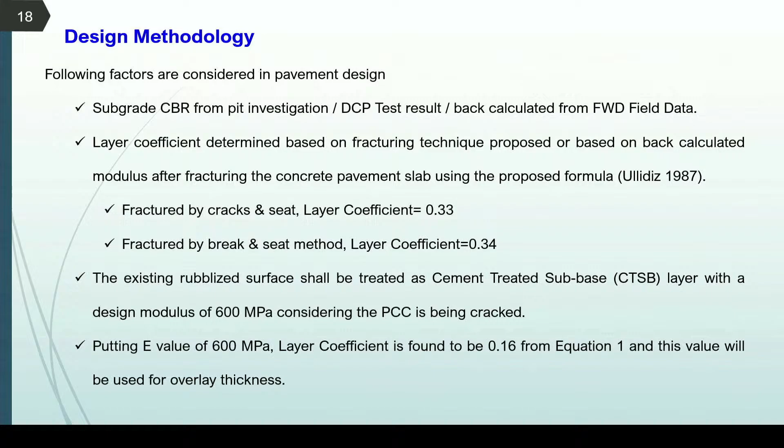हम लोग यदि आस्टो MEPDG गाइडलाइन के हिसाब से डिजाइन करने जाएंगे तो हमारा सबग्रेड का मॉड्यूलस कंबाइंड मॉड्यूलस आएगा GSB प्लस सबग्रेड का, जो हम मैक्सिमम रेंज में 100 MPa अडॉप्ट कर सकते हैं। उसके बाद जब एग्जिस्टिंग कंक्रीट पेवमेंट को रबलाइज या फ्रैक्चर कर दिया है तो डिपेंडिंग ऑन द टाइप ऑफ फ्रैक्चरिंग मेथड हम उसका इलास्टिसिटी मॉडुलस अडॉप्ट कर सकते हैं।

ये दोनों इलास्टिसिटी मॉडल्स अडॉप्ट करने के बाद हम जो भी डिजाइन ट्रैफिक है उसके हिसाब से पेवमेंट डिजाइन करेंगे इन लाइन विद IRC गाइडलाइन, जो IRC 37 है, 90% रिलायबिलिटी को कैप्चर करते हुए, जिसके हिसाब से हम 4.5% एयरवॉइड और 10.5% वॉल्यूम ऑफ बिटुमिन लेते हुए मॉडिफाई फटीग इक्वेशन यूज़ करेंगे जो 0.577 इंटू 10⁻⁴ (1/epsilon) होल टू द पावर 3.89 इंटू (1/रेजिलिएंट मॉडुलस) होल टू द पावर 0.854 होगी।

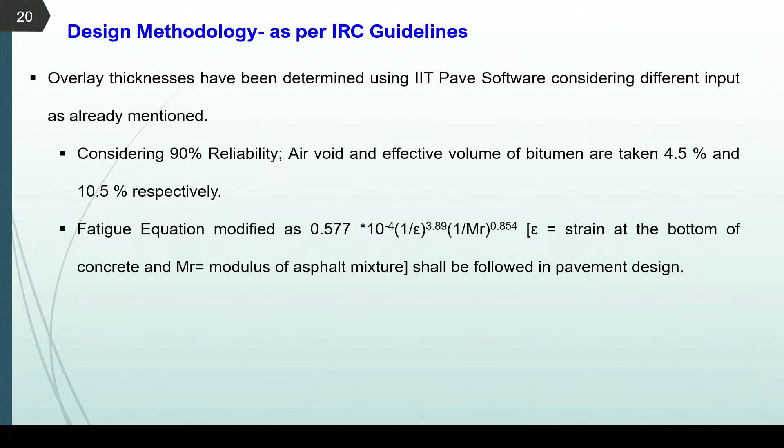अब यदि इसका डिजाइन एग्जांपल देखें तो एग्जिस्टिंग PQC की थिकनेस एज्यूम कर लेते हैं 275 mm, DLC 150, GSB 200 mm और एग्जिस्टिंग CBR 8%। डिजाइन ट्रैफिक एज्यूम कर लेते हैं 200 MSA है।

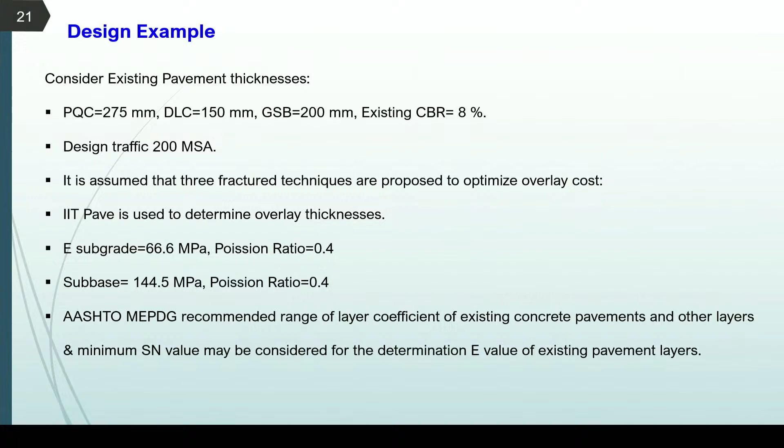अब यदि हम आस्टो की डिजाइन गाइडलाइन के हिसाब से देखें तो हमारा सबग्रेड का मॉडुलस 66 MPa, सब बेस का मॉडुलस 144 MPa रहेगा। अब हम इसको कंपैरिजन करें, यदि ब्रेक एंड सीट मेथड अडॉप्ट करते हैं तो उसमें

लेयर कोफिशिएंट की जो वैल्यू रहेगी 0.2 से 0.35 के बीच में। यदि इसकी वैल्यू ब्रेक एंड सीट के केस में 0.21 अडॉप्ट करते हैं तो उसका मॉडुलस हो जाएगा 900 MPa। यदि क्रैक एंड सीट में 0.2 का लेयर कोफिशिएंट अडॉप्ट करते हैं तो उसके हिसाब से 825 MPa और यदि रबलाइजेशन करते हैं तो उस केस में 600 MPa।

हम इन वैल्यूज को अडॉप्ट करते हुए फॉर सब बेस इस एग्जिस्टिंग रबलाइज पीसीसी को एज़ अ सब बेस ट्रीट करेंगे, उसके ऊपर हमारा WMM का लेयर और उसके ऊपर DBM और BC लेयर, और ये सारी चीजें हम IIT पेव से निकालेंगे।

IIT पेव रन करने के बाद यदि हम पहला मेथड क्रैक एंड सीट अडॉप्ट करते हैं तो उस केस में एस्फाल्ट ओवरले की जो थिकनेस आती है फॉर 200 MSA वो 40 BC और 50 DBM आती है। यदि इसी चीज को परपेचुइटी के हिसाब से डिजाइन करेंगे तो BC 50 mm और DBM 95 mm आता है।

और यदि आस्टो मेथड के हिसाब से डिजाइन करते हैं जो पर्टिकुलर स्ट्रक्चरल नंबर के बेसिस पे आएगा तो उस केस में 40 BC और 60 DBM आता है। सिमिलरली फॉर ब्रेक एंड सीट मेथड 40 BC और 50 DBM आता है नॉर्मल 200 MSA के लिए, परपेचुइटी के लिए 50 BC एंड 75 DBM और आस्टो मेथड से 40 BC 50 DBM।

रबलाइज थर्ड मेथड के केस में करेंगे तो हमारे IRC मेथड से 50 BC और 90 DBM आता है, परपेचुइटी के लिए 50 BC और 150 DBM और आस्टो मेथड से 50 BC और 170।

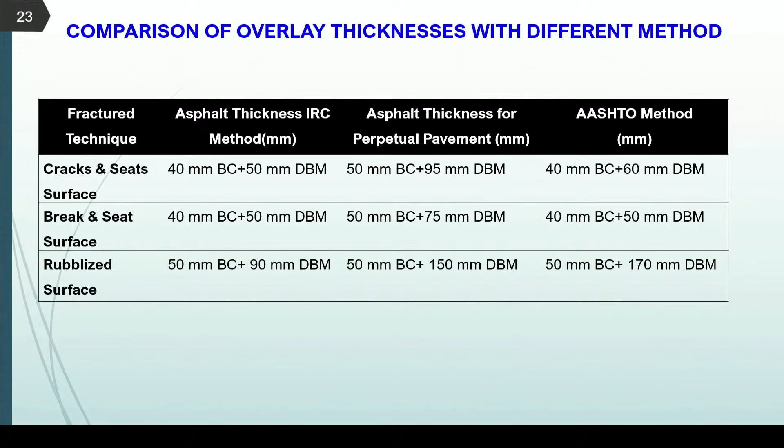DBM। इस केस में हम तीनों तरफ से देख सकते हैं कि रबलाइज जो मेथड है वो सबसे ज्यादा कॉस्टली रहेगी क्योंकि ओवरले थिकनेस उसमें सबसे ज्यादा आती है। तो कोई भी अप्रोच अडॉप्ट करने से पहले ये जरूरी है कि हम तीनों मेथड का कॉस्ट एनालिसिस कर लें।

अब हमारे इंडियन कंडीशन में कोई भी एक प्रॉपर गाइडलाइन अवेलेबल नहीं है तो हम इंडियनाइज्ड गाइडलाइन डेवलप कर सकते हैं बेस्ड ऑन द आस्टो डिजाइन अप्रोच। जो भी टेक्निक अडॉप्ट करेंगे ओवरले डिजाइन के लिए, हम ध्यान में रखें कि किस समय पे ओवरले का डिजाइन कर रहे हैं। यदि अर्ली स्टेज में कर रहे हैं तो फ्लेक्सिबल ओवरले को डिजाइन 30 साल के लिए करें।

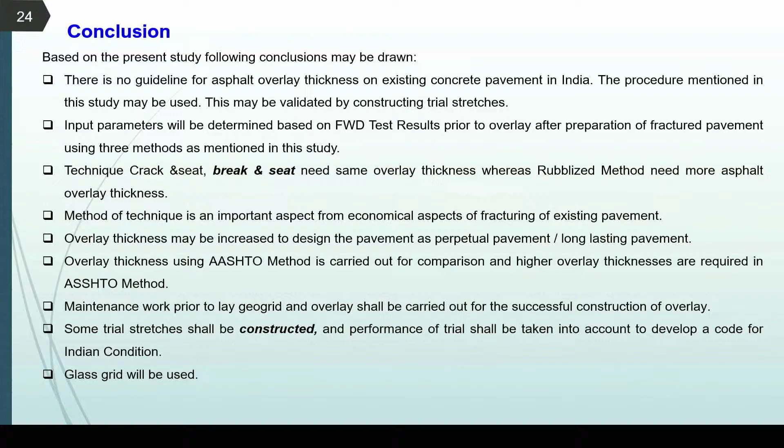यदि रिजिड पेवमेंट डिजाइन था तो उसी डिजाइन लाइफ के हिसाब से फ्लेक्सिबल ओवरले डिजाइन हो। जो भी एग्जिस्टिंग पेवमेंट में ओवरले ट्रीटमेंट अडॉप्ट करने वाले हैं, उसके पहले प्री ओवरले ट्रीटमेंट करना जरूरी है ताकि न्यू ओवरले डालेंगे तो उसके ऊपर कोई भी क्रैक रिफ्लेक्ट बैक होके ना आए। और सबसे ज्यादा जरूरी है कि जो भी डिजाइन गाइडलाइंस बेस्ड ऑन आस्टो MEPDG इंडियनाइज करेंगे, उसके लिए ट्रायल स्ट्रेचेस कंस्ट्रक्ट किए जाएं। थैंक यू।